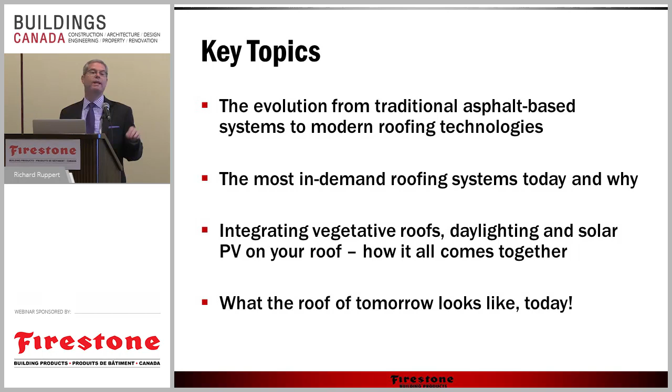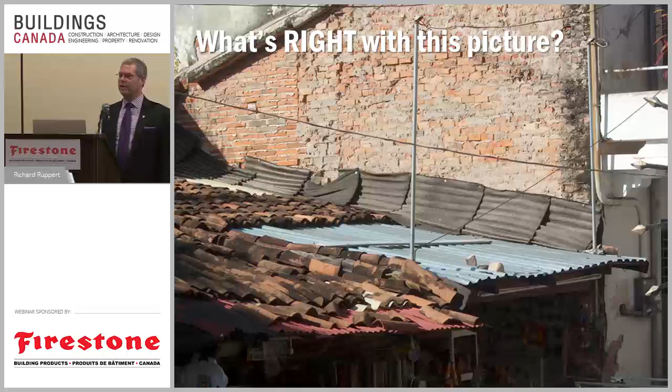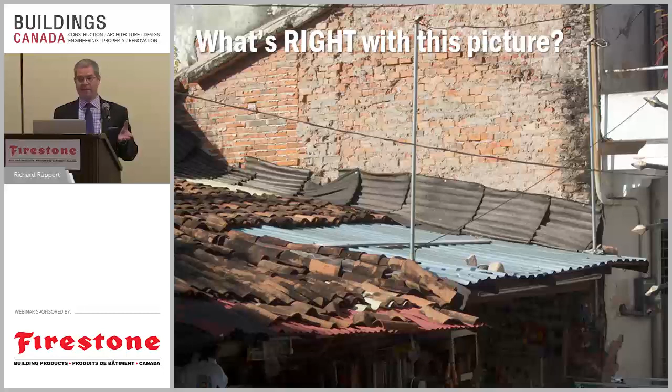What else is really present here? What do we see there? Not just flashing, but step flashing. Again, a basic understanding of how things work. Now, if anybody's environmentally conscious and sensitive to the environment around them, I think you'd be hard-pressed to say that this doesn't make ample use of local and regional materials. I'm guessing that most of this stuff came from less than a 500-kilometer radius, so you've met some LEED credits somewhere along the way, I'm sure.

It's a little bit in the dark there, but this is a retail operation, so it is, in fact, a commercial roof. There's no question about it. And you've got mixed use of materiality. What it's really meant to say is that even in the most primitive of circumstances, the need, the understanding, the provision of basic shelter is right here.

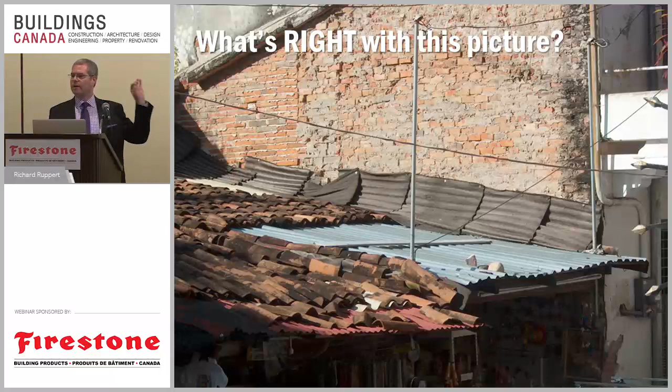It's right here in our heart. It's right here in our mind. We know this stuff. It's common sense. It's not rocket science. Now, there are a lot of elements of rocket science that come into play, no question about it—the advancement of the materials, the differentiation—but when it's all said and done, it goes back to a very fundamental idea or concept. When we talk about commercial roofing, it's pretty simple. There's really only three categories that we need to discuss.

Bitumen-based systems, asphalt, coal tar pitch. I have to apologize in advance, I am not as clear on the availability of certain materials here in Canada as I am in the lower 48. But coal tar pitch is only available from one manufacturer and is not very well used anywhere in the States at this point.

Is coal tar still something that you can find here in Canada? Yet arguably at one time, maybe even now, it could have been considered the most sustainable roof that's there. I had the good fortune of working on a project in northern Indiana, where I'm coming from, a cold weather climate, a lot of built up bitumen up there.

A 75-year-old roof. The problem with it was that the person who had maintained it for 74 years prior passed away - I should say the 2 or 3 tenants. But therein lies part of the problem that we have with asphalts and bitumens. Not only are they constantly changing and organic, but the persons who are entrusted to take care of them are dwindling. The supply is no longer putting together a demand for persons to be able to do this.

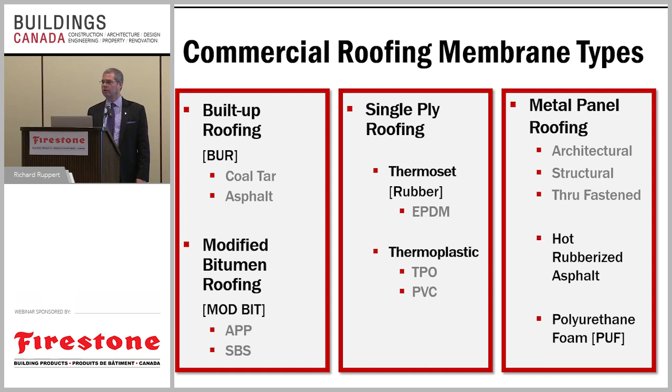And polyurethane foam, puff roofs for short. It's just as the name implies, it's a spray foam that goes right on top of whatever's up there. Encapsulates it all, and once you've put it on, you're never going to get it back off. So it better work. It's an incredibly good roof for the desert southwest, arid climate. I would be hesitant to promote it in any other environment.

So when it's really all said and done, we've got 2 categories: bitumens, single plies.

When we talk about bitumens, there's really two families. The old built-up four plies—more plies, more tries, that's right, more plies to get it right. They benefit from their inherent redundancy. They have a long history, 100 years or more.

They use a lot of water-resistive materials, most often relatively organic in nature. So from the time they are put down, they begin the deterioration process at somewhat an accelerated rate. Now there are stabilizers, elements that go in to cut down UV degradation and help with the amplification that water or moisture brings. But when it's all said and done, the technology and methodology has remained pretty much unchanged since its inception about 100 years ago.

And then the modified bitumens, the two-plies. We've taken something that was really aggressively involved, very craftsman-driven if you will, and drawn it down into two plies, two sheets, a base and a cap. Maybe a base, interply, and a cap if you need extra dimension or durability out of it. But the beauty is that those plies, that base and cap, are manufactured—consistent dimension, consistent thickness, predictable behavior.

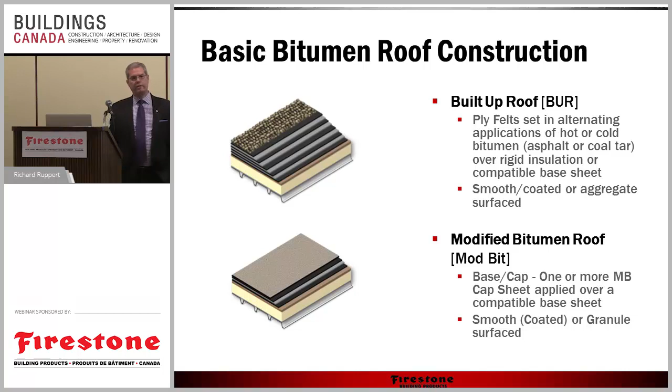But really, when we talk about bitumen construction, it's either four or two, that's about it. Built-up roof construction, just as the name implies. Here you can see you've got your hot bitumen going down. You've got what are called ply felts. Those ply felts get embedded into that hot asphalt, that hot pitch. And then another layer, and another layer, and another layer, each one staggered a quarter over each time.

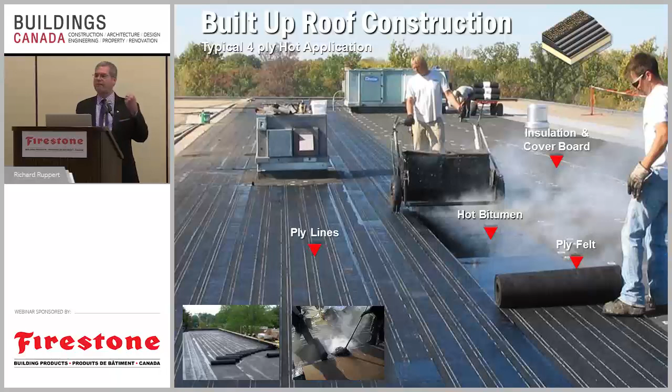So that when you ultimately get done, no matter where you pierce it with the screwdriver, which invariably is going to end up going through a roof at some point, it will have gone through four plies of material. Inherent redundancy, that's its real strength. Very, very susceptible to changes in environment, from hot to cold, from age, from dry to moist. All of those have a fatiguing effect on that assembly. That redundancy becomes an absolute necessity.

What do we do to protect it? Well, more often than not, we put aggregate on top of it. The aggregate creates a stepping surface, something that can take impact. But it also, maybe more importantly, blocks out some of the UV that might otherwise destroy that top layer.

What do we see, though, downtown? What do we see in most cities? We see some sort of paint, some sort of application, aluminized. Look out of the building, anybody staying on a top floor of a hotel around here—take a look at the roofs down below you. You may see a lot of silver roofs, an aluminized paint essentially, that's just protecting that top layer.

But when it's all said and done, there's a lot of work going on. Why? Because the roof is being manufactured in place, in situ. The elements may have come on a truck, but each one was individually handed up onto the roof and included to essentially manufacture the roof right there on top.

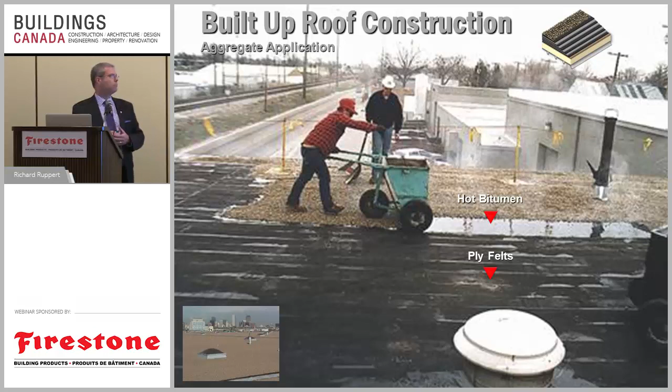There's recently been some other concerns about built-up roofs, particularly asphaltic roofs in general. Are there carcinogens involved? Because there's a tremendous amount of petroleum invested in this process. Is the bitumen we're using in place of coal tar as carcinogenic, or even possibly more because of their chemical composition? It's not a natural ingredient. To coal tar's benefit, at least a lot of it was organically being combusted or broken down. Is it maybe not carcinogenic, but is this high exposure, continued exposure to this, going to be a problem?

Because of off-gassing—as things deteriorate, as things break down, they begin to release whatever's within them, correct? Well, think about this: a petroleum-based organic material being released into the environment, and somebody's working in that every day or working around that every day. Are there inherent risks there that might not be present in other technologies out there?

There's a lot that contributes to this, and I haven't even touched upon the availability of oil, the availability of the ingredients. I know this is true in Canada just as in the United States—the asphalt, the bitumen manufactured for the roofing industry is from the bottom of the barrel. You know, when we use that term, it literally is from the bottom of the barrel. But technology has advanced and is able to crack the molecules lower and lower to raise it to a higher percentage of use, a higher purpose, a better purpose.

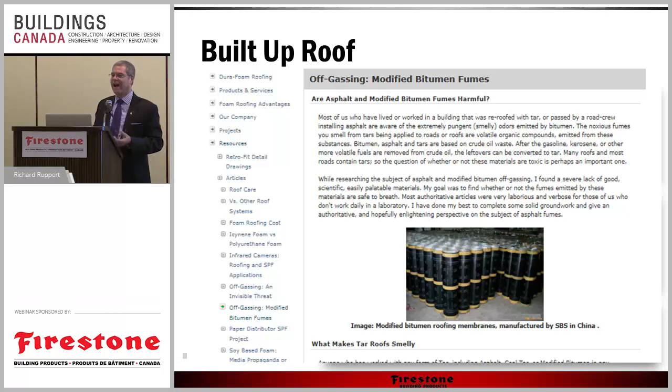There's one, SBS. The reason I know that, I work for Firestone Building Products. I get to see how much we sell of everything, and we sell all of it, by the way. That's one of the things that gives Firestone Building Products a unique opportunity, is that we're the manufacturer of all forms of commercial roofing. We're number 1 or number 2 in the United States, and we rank very highly in single-ply categories here in Canada for sure. So we can see all of it.

Anybody want to tell me how many rolls of APP, or plastic modified bitumen, we shipped to Canada last year? Just a random number. 3,000? 15,000? That's right, zero. And it actually comes as somewhat of a surprise, because it is a northern climate, I get that.

APP doesn't really translate well because it's plastic. Plastic wants to harden. SBS responds favorably well. It's rubberized, it has a higher tolerance for cold temperatures, right? But the single most popular roofing in New York City, which is arguably a cold weather climate, is APP.

APP torch down, to be exact. Why? Because you only have to have a truck and a torch to be in business, right? It's pretty simple. Well, I'm sorry, New York City - torch, truck, and a driver. Nobody pays for staging, so meter-wide roll, they can just toss off however many rolls they need. And they roof from 6 o'clock at night till 6 o'clock in the morning, and then they're gone again.

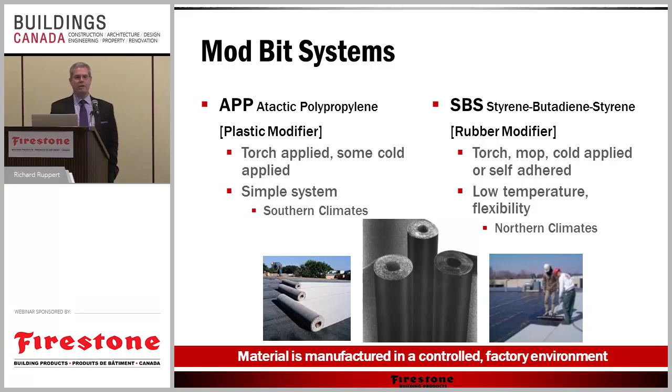It is manufactured in a controlled environment. That does make it one step above, in some ways, the built-up roofing market. There's no question about it. And you can see that it goes down pretty simple - base layer and a cap layer. Offset it by a half. Start with a half sheet on the top cap.

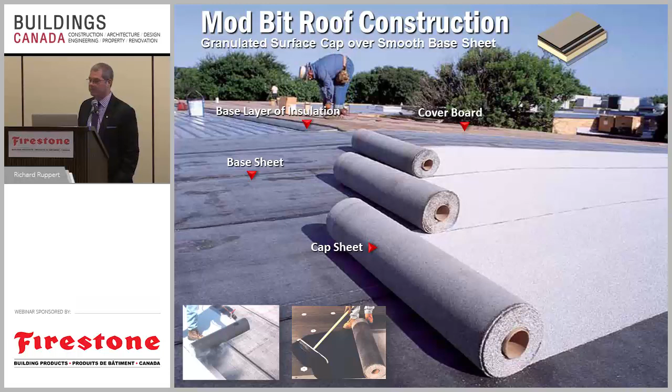It can go down as a torch down. It can go down in what's called cold apply, where you're basically mopping it out or brushing it out. It can also go down as a hot applied, at least with the SBS. You see that going down as well. You can only hot mop the SBS, by the way. But you can see that we're still largely manufacturing the roof on the roof. We're having to perform all of that right there.

By the way, when you have something like this, when you're working with that, you need 2 crews. You need a boot crew and a tennis shoe crew, and I'll explain that in a few.

However, because of the advent of modified bitumens, or the use of modified bitumens, you can also get those in bright white caps. So if you are trying to meet a higher initiative, a LEED or a Green Globe, or just want that higher reflectivity for whatever reason you're trying to achieve that, there are bright white caps out there available to you. There's no question about it.

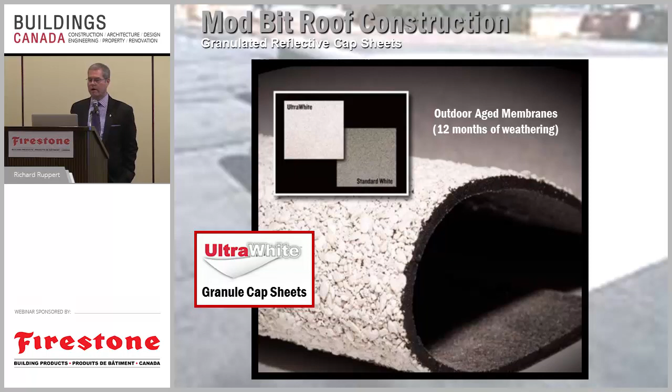But by and large, this is still the most popular way for modified bitumens to go down, APP or SBS. Matter of fact, SBS is of the two, the more growing, or has a higher growth potential.

But the bottom line is it's still open flames. You've got that open torch. What does this do? This is called a dragon wagon, by the way, for obvious reasons. You now no longer have one man or woman up there with a torch swinging it back and forth. You've got literally an entire explosive device spewing out 5 or 6 jets of flame on top of the roof. What's the inherent problem here?

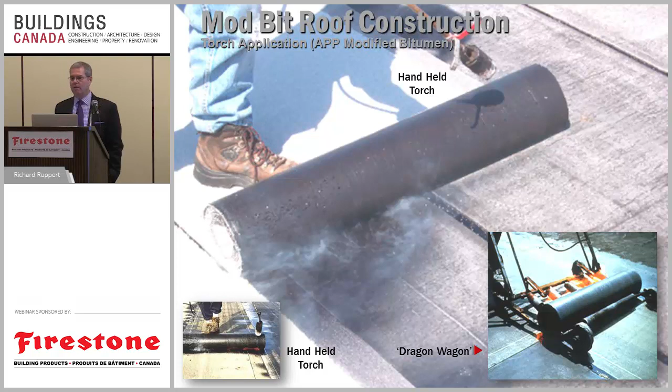Control. Control after the fact, though. Quite frankly, it is not so much during the time of installation, because you're seeing that, you're walking, you're doing your thing, right? It's good. But at the end of the day, what else has been affected that wasn't apparent when you were there during the working hours? I can give you examples from right here in Canada itself.

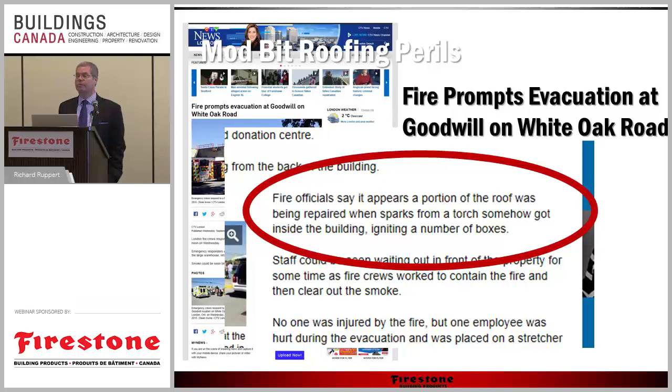This is the Goodwill out on White Oak Road. Fire officials say it appears a portion of the roof was being repaired when sparks from a torch somehow got inside the building, igniting a number of boxes. That's called incidental damage, by the way. The roofer and the roofing manufacturer, they're essentially going to be held harmless, because they can't be held responsible for anything inside the building.

And it'll go through a lot of litigation. It'll be fought, and there'll be a lot of battles back and forth. It'll be in the paper a few times, but when it's all said and done, it's the owner who's going to take the onus for this in their insurance.

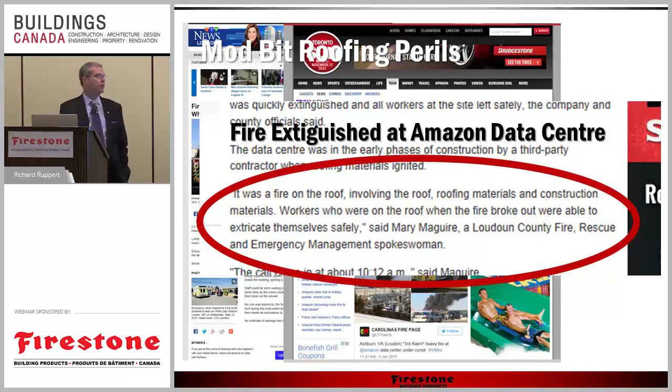Fire codes do end up getting changed. This was Ontario's fire marshal. By the way, this was just last year, and unfortunately, tragically, this fire smoldered for about 40 minutes before anybody even knew about it, because it was in between the roof and the ceiling. It was not exposed. And the valiant men who showed up to fight that fire, 2 of them lost their lives. It was not intentional. It was not something that anybody would have ever thought could have happened, but it happens a lot. It happens a lot.

Asphaltic roofs, bitumen roofs, have a large part to contribute to that. So at the very least, exercising a high degree of caution when doing these types of systems is a necessity.

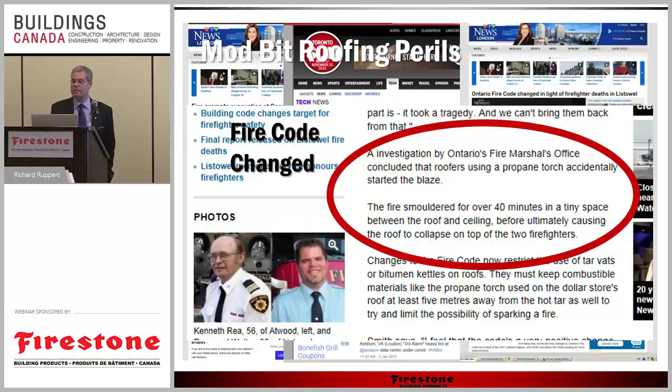So what are our key takeaways? Well, it has been performing well for many, many years. There are a tremendous number of installation options. You can say that either as a positive or a negative, because when there's so many ways to do something, there's rarely any one good way to do it, quite frankly.

Where I'm coming from in Indiana, we have a horticulturalist, and people were having a problem with moles in their gardens and lawns, and his name is Dick Crum. I said, Dick, I have a mole problem in my yard, what can I do to take care of it? He goes, well, there's about 50 ways you can do it, which was another way of saying there's no way to do it. There's no good way to do it.

They do capitalize on their redundancy. There's no question, more plies, more tries. It's a little tongue-in-cheek, but it does build in some resiliency. But it has to be there because it's really sort of compensating for degradation. Thermal shock, hot and cold, water, UV, all those things are constantly barraging what is largely an organic element.

And they have adapted to today's world. We've seen that. Bright white. It's the first one I can think of right away.

But they're often complex, and we've seen when we talk about the torch down, we talk about the fire, etc., they can become unwieldy. And there's a dwindling labor pool that, whether they have the skill or not, don't have the desire to do it.

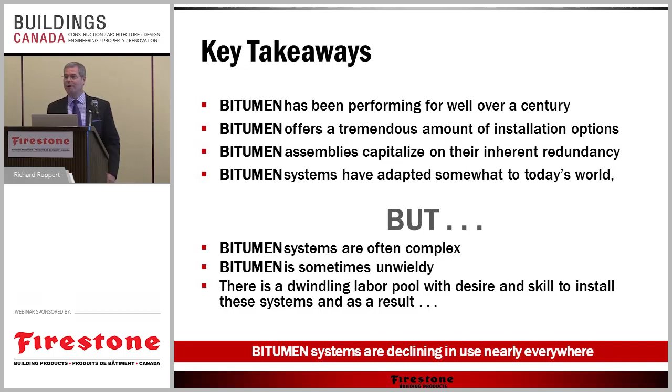Which brings me to the viable alternative, maybe the preferred alternative. But I have to let you as professionals determine that. You have to become knowledgeable, you have to become comfortable, you have to gain that understanding of whether or not this makes sense for you.

But at least from my own perspective, I think you have to give it a fair shake. You have to really look at what these alternatives offer you, but more importantly, what do they offer to the ownership of these roofs? Because we specify them, we sell them, we install them, and then we're at the next roof. Somebody has to own this thing, and it's going to be that person that has that building for the next 10, 15, 20, 30, or in the case of school systems, hospitals, 40 or 50 years maybe.

So think about that. As I mentioned, when we talk about single plies, there's only two types: thermoset and thermoplastic. When we talk about thermoset, there's only one, EPDM. Talk about thermoplastic, there's only two, TPO and PVC. And you can see some of the things that really define these.

EPDM is a permanently formed membrane. It's vulcanized. It's rubber. Now, it doesn't come from a rubber tree plant, but it mimics that, just like tires. Tires do not come from rubber tree plants, but they mimic that. The reason I know that is because the company I work for, Firestone Building Products, has a key name in it. Does anybody know what might make us uniquely qualified to be in the rubber business?

Only about 125 years of tire manufacturing. Harvey Firestone manufactured those tires over 100 years ago. He first started out with natural rubber. What color were they? Cream. Unattended rubber from a rubber tree plant, organic, is cream colored when it's coagulated, when it's made into gum.

Adding carbon black, a granular powdery ingredient that goes into that goo, is what gives it its tenacity, gives it its UV protection, gives it its longevity against wear. Before Harvey Firestone, tires were white, and now they're black. We like to say it's because he wanted to see a better looking car at the Indy 500 track. I'll buy that. I'm from Indianapolis. I like anything racing, Dobermans on roller skates, I'm there.

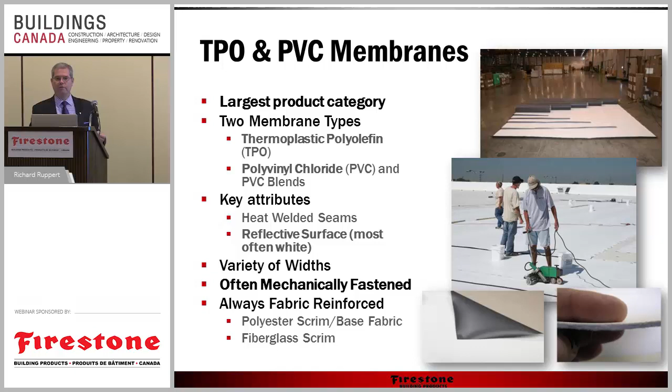We saw that it didn't work early in the 1980s. PVCs came over from Europe. They were dark in color. Those things heat up, they had no reinforcement, there was nothing there to keep it intact. We had things that were called shatters. Literally, they would shatter. It looked like a dry creek bed on top of the roof when it was done. I had the good fortune of being inside a building when that happened one time. It sounded like ice splitting in the spring. It's when you know you've got to pull the roof back off. My friends in Thunder Bay know what I'm talking about.

So, in any regard, the difference is PVC and TPO are both plastic, but TPO is what it is. The ingredients that go into that are alloyed together to make it soft and pliable by design. Polyvinyl chloride, PVC, has to have a plasticizer. Without the plasticizer, without the softening agent, PVC becomes what it was intended or what it wanted to be. Schedule 40 piping, think about it.

Rigid PVC piping, very, very popular, used in a lot. No plasticizer. The plasticizer is the ingredient that makes it pliable. But in simple terms, it's what's agitating that compound. It could be liquid, could be actually what they call a dry plasticizer. But in order for the dry plasticizer to go in, it still needs a liquid to embed it.

And from the time that it's manufactured, it is now fighting and really having an inner struggle with itself, molecularly or chemically, because it wants to evacuate. The plasticizer does not want to be in the material. It keeps it pliable, but it wants to evacuate. That scrim that's in there does a lot to help it get purchase on something to stay in there.

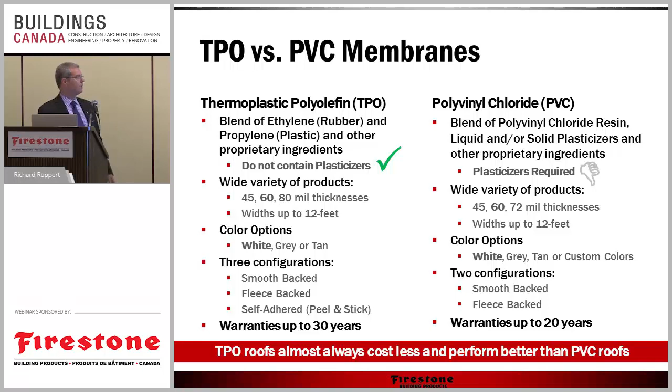Less involved. I'm going to spend a little more time, though, talking about thermosets. Thermosets, one category, EPDM. EPDM rubber, synthetic rubber. Common thicknesses, commensurate with what we normally understand, 45, 60, 90 mil.

You're going to find that this is true across all stations, across all manufacturers. There might be a little variance here and there based on application. Pond liners are generally only 38 mil or 35 mil, but that's not roofing. We're talking about roofing today.

60 mil, no question, the most popular. And I find very little cause, you should find very little cause, to really be considering a 45 mil. The greatest use, the highest use I find for the 45 mil membranes at this point, just based on application, is when you want to provide a sacrificial layer, a separate loose laid layer to protect the main body of the roof. Works very, very well for that kind of an application.

So even in an inverted roof? Even in an inverted roof.

Part of the reason is because of puncture tenacity. I understand that an inverted roof might in fact be considered a protected membrane, quite frankly, because you're putting some sort of a ballast over the top of that, oftentimes an insulated composite ballast, maybe a concrete pad within. But the point is that things will find their way down to that roof surface. Things will be underneath those pads as they're going down, et cetera, et cetera. And any kind of traffic, any kind of impact on that suddenly makes that have a higher potential for puncture.

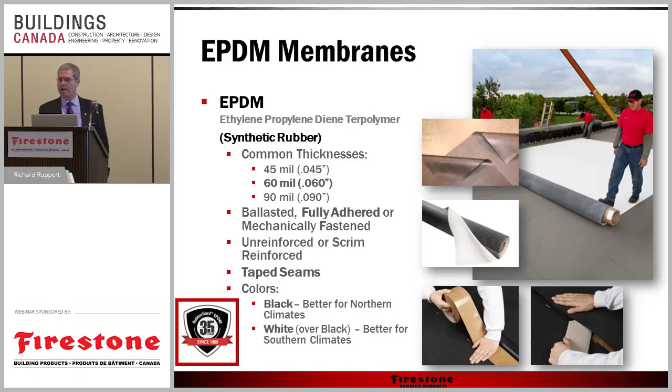They primarily are black, but you're going to find that there's also white membranes as well.

They use seam tape. Why is that important? Because for a long time with single plies, the Achilles heel of the single ply membrane was the seaming—how do you get it consistent? Well, that element has been removed with seam tape. Seam tapes themselves are engineered to be much more predictable and precise in their application, and the adhesives are designed to gain greater tenacity over time. All adhesives have to cure, right? No question about it. So with EPDM, as that tape seam cures, it actually gains higher and greater purchase on the membrane.

Now you will see a small bead of sealant run along the cut edge of the membrane oftentimes. What is that really doing? It's only necessary to be there for the first 2 to 3 months of the application, because it's protecting the seam while it cures. So sometimes you'll see the sealant at that cut edge start to look like it's degrading—rest assured, you do not have a problem, because it's most often there only to protect that major seam as it cures out. Once it's cured out, no issue.

Cleaners and primers—a variety of those available, and we'll talk a little bit more about those as we get into it. And some way to apply it. These are really the primary contents of what you have to have for a single ply EPDM roof. That's it. No kettles, no pumps, no machinery.

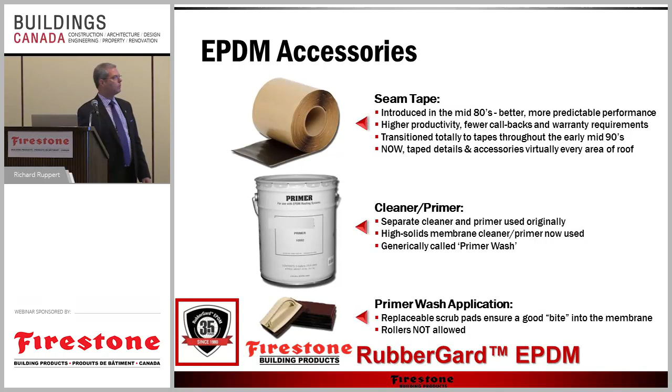Yes, there are some buckets that are always 5 gallons, and we'll see in other ways those become important. But the beauty of it is all the accessories. All of these single-ply systems, and most particularly when we talk EPDM, have pre-manufactured, pre-engineered accessories—the boots, the inside and outside corners, the fasteners that might be needed as a supplemental application when you're not fully adhering everything or you're tying off at the perimeter. And then all of the sealants and/or adhesives are also especially designed, not just for the material itself, but also the region that the material is being performed in, which is becoming more and more of an issue every day.

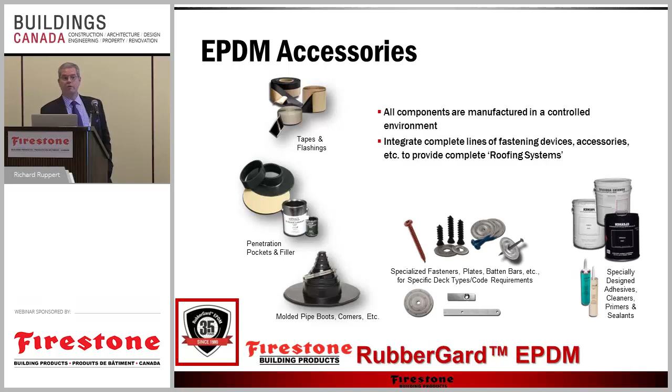Thank you very much. The question is, what is the life expectancy of an EPDM roof? Well, we don't know yet. What we can say with absolute certainty is that 35 years has been easily achieved, and we're heading towards 40. As a matter of fact, Firestone Building Products this year is celebrating its 35th year in the EPDM roofing business. And the first roof that we put on is still operational and functional in Wisconsin—not exactly a mild climate environment. Best guessed estimates are that the membranes themselves have a lifespan that's going to go well beyond 50, maybe 60 years. Who knows?

It's always been the case, and this is true of any of these roofing systems—it's not necessarily the base material or the core material. It's the application, the details that have gone into it, the seaming, the flashing, those ingredients that make it a comprehensive system, that have been more prone to failure than the materials themselves. So right now, the lifespan of the material itself is somewhat indefinite, quite frankly. A lot of things go into it.

How easy is it to put these things together at this point? Well, it's pretty easy—you mark the membrane, but oftentimes we already know what that mark is going to be like. You do have to scrub it or clean it because there's talc on an EPDM membrane when it's manufactured so that it doesn't grab onto itself during vulcanization. But you want to make sure that talc is washed away so you've got a dry, tacky surface. Applying the tape over the top of the primer, a bit of braying of it, using a roller to make sure you've got good purchase on the material, then lapping in the adjacent material and pulling out the release liner of the tape, then braying over the top of it, and you're essentially done. You might go back in with a beaded sealant if specified along that cut edge, but otherwise, that's all there really is to putting together one of those seams. And we know that we have a life expectancy on that seam that can be warranted for up to 30 years.

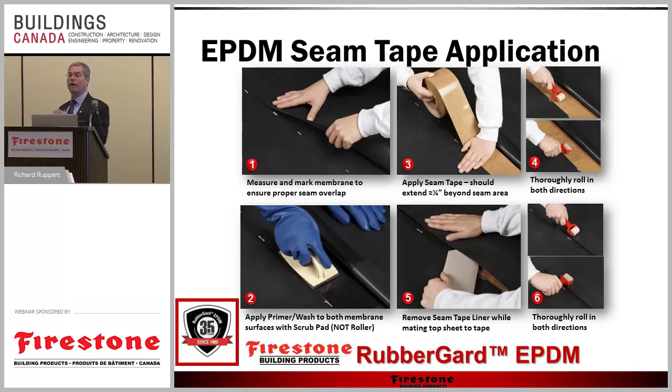Not talking about the backsides of parapets and flashings like that, but someplace that you know is going to have a certain amount of lingering water, let's say. That might require a tape over. But that's all there is to it.

They've been improving, and they've been in use in all geographic areas for well over 30 years. All of the historic performance issues have been resolved. Some people used to say that rubber roof shrinks. Well, it didn't really shrink. What was happening is that persons were putting it out with too much tension to begin with, and so it was just essentially returning to its natural shape.

What we've learned over time is that when you put it out there, you need to let it relax into place a bit. And the way that they were being tied off at the perimeter, it used to be they were just shooting it down with a board and some cap screws. Now there is what's called a base tie-in or a relief strip that you put into the membrane or the roof surface at the corner, at the perimeter, that can take the tension of the horizontal so that anything that goes vertical, up and over parapets and curbs, is essentially in a non-stressed fashion.

You can simply adhere that or affix that to the backside of the curb of the parapet, and it's not being affected by what's happening in the horizontal plane of the membrane. So those are the things that we've learned and that have been resolved over time.

EPDM has the greatest variety of membrane options available to it, no question about that, and the greatest variety of installation options available to it as well. And when it's all said and done, these have the highest warranty available of any of the systems out there. You have to go to special measures sometimes to get extended warranties in asphalt for certain. You have to go to special measures to get extended warranties in thermoplastics because the plastics and the way you weld it are significantly different. So it's sometimes easier to achieve extended or longer warranties on EPDM roofs.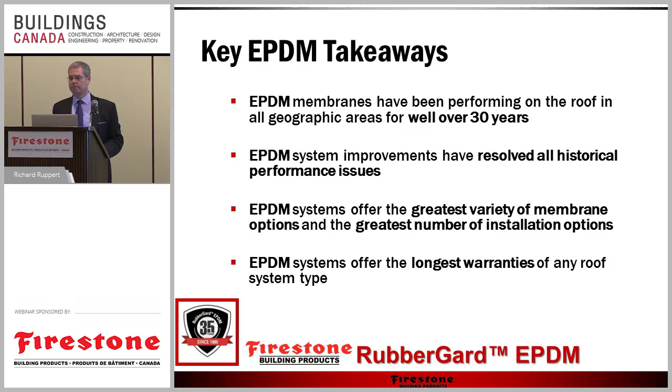When we talk about roofing systems, we're really talking oftentimes about how they're attached. Yes, we talk about their basic composition - it's an asphalt roof, it's a TPO roof, it's an EPDM roof. But maybe more important, and certainly very important to its long-term performance, is how it's being affixed to the building. How does it stay in place? How is it going to perform under the dynamics that affect a roof?

Because you not only have wind scour and rain, the very obvious ones, but you also have uplift pressure - pressure that's happening inside the building. That's dramatically different from a big warehouse with overhead doors versus, say, a speculative office building with a relatively small footprint. And those dynamics are happening from under the roof, pressuring it, pushing up on it.

What's the single most destructive force on a roof, though? Bar none - gale force winds, hurricanes, tornadoes, sun, UV? No, good answer, though. The most destructive force, bar none: the mechanical contractor, no question. Rooftop traffic from the mechanical contractor. I'm picking on them. Any mechanical contractors here today? Good, because we won't have to lynch you.

That rooftop traffic - and why do I pick on the mechanical contractor? Because if they're up there servicing rooftop units, all rooftop units have filters on them. All those covers on those units have 36 tech screws that go around the perimeter. After the first filter change, how many tech screws go back in? Two - upper left, upper right. Where do the remaining 34 tech screws find themselves? That's right there on the membrane of the roof, underfoot of the contractor who just serviced the filter.

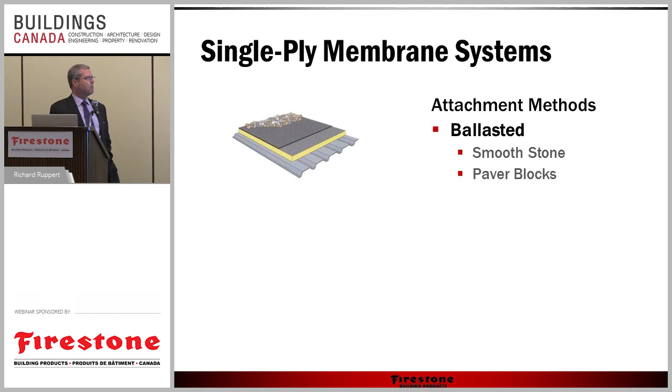Oldest and longest sustaining ballasted membranes. It's basically where you're just putting the membrane underfoot with something to weight it down. Concrete pads, more often than not, river wash gravel. Could still be considered an environmentally sensitive roof. I mean, you're adding mass. The color is relatively light.

That thermal density actually qualifies it in the States for what's called Title 24, the highest standard established by the state of California. They come out with the highest standards to be met or not met by everybody out there. But just be aware that they have a lot of weight involved with them. These put increased weight on the rooftop building.

Where do I see these actually most popularly employed? Single-story grammar schools, K through 12 kind of work, no question. And if you do employ this, the key word here is ballasted. There's no mechanical attachment, no adhesive to make it fully adhered. It must float, and the elements under it must float too. The insulation is loose laid, the membrane is loose laid, and we're just weighting it down.

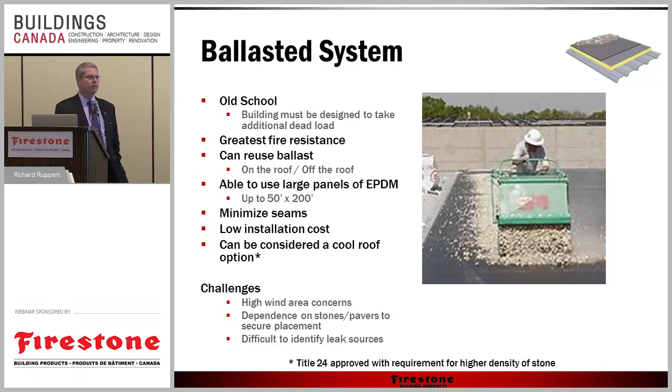Beautiful thing, they can do very large panels because they're uninterrupted, just seam to seam to seam. It is sometimes a little bit difficult to find the leaks, as you might imagine. And this is what it looks like going down. Protection mat is always a good choice. It's not absolute, but it is a good choice. And you can see the precision with which it's laid.

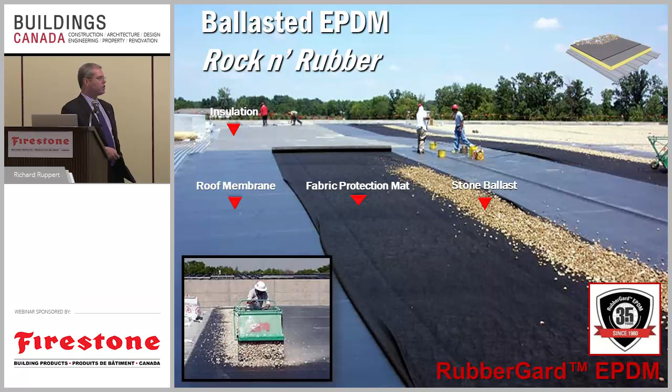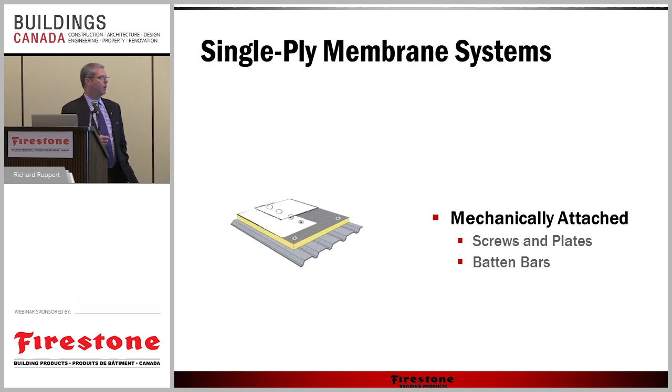Mechanically attached, I really reserve that for the thermoplastics. That's where it has its highest degree of popularity. It uses screws and or batten bars. You're kind of limited to narrower panels, or at least narrower widths to think about when putting it down, because more often than not you're going down in the seam itself. That attachment point has to work to withstand those uplift pressures from behind.

So you're talking about 10 feet, 8 feet, 5 feet. Problem is it goes off module. If things are manufactured in 10 and 12, that's great, and if you can get your seams to be 10 and 12 feet apart, that's great. But most of the standardized insurance protocols and uplift resistance requirements out there go out to certain figures - you can see this for yourself. They're going to require a seam every 8 feet or every 6 feet or something like that, and it's going to go off module. It's going to cause you some problems getting what I call efficiency out of the materials.

And it's almost always a linear attachment as well. It can allow for flutter. These things get noisy. In colder climates, where you haven't taken necessary precautions with air barrier infiltration or insulation, you can get flutter. But more importantly, you can get frost, because there's a certain amount of cavitation that happens underneath a mechanically attached membrane. When that pressure's in there, it may only open it up a small millimeter or centimeter, but that's just enough to possibly have moisture form beneath the bottom side of the membrane and the top side of the insulation.

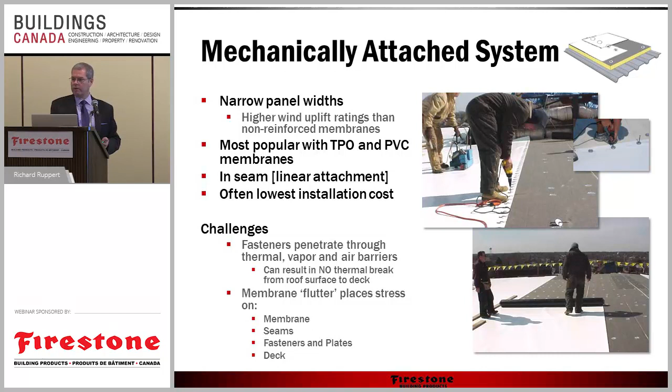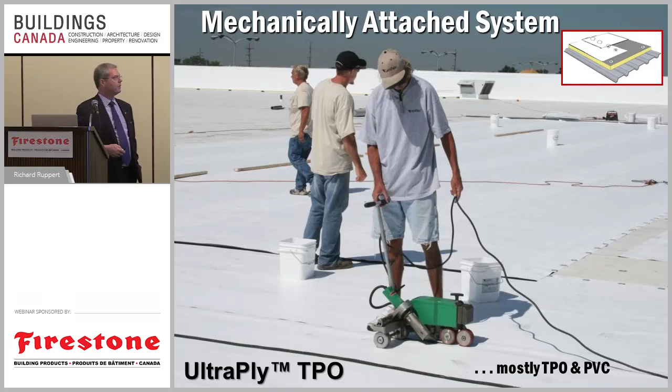There is an alternative when you are talking about doing mechanically attached induction welded. This is where you are able to attach the entirety of the system down to the substrate, the deck, and the plates themselves. The fasteners have the constituent TPO already on them. You come back and you magnetically or heat weld it to the backside of the membrane. So what does that mean?

Well, it means that your membrane goes down over the top of this. You can weld it wherever the seam or the sheet ends, as you would want, and you're actually attaching it from the backside with this welder. Then as you hit each one of those, you're hitting it for about 30 seconds. Then you come back with this weighted tool, it's almost like a coffee can full of concrete, basically, with a magnet in it, and it just further makes sure that you get that contact. You're going hand over fist, just walking right down the rows to do that.

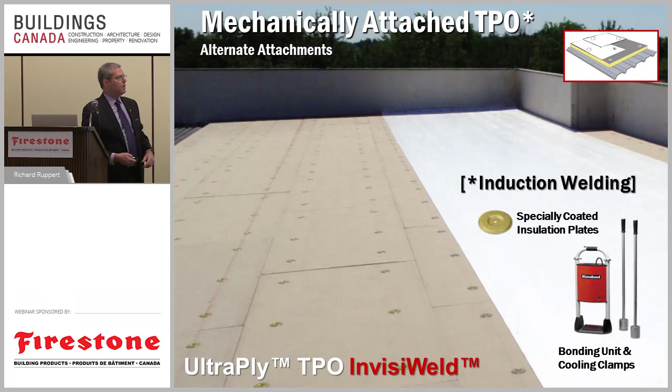Another way that you can actually attach the thermoplastics is with asphalt. So you can encapsulate an existing bitumen roof with a TPO membrane. You use what's called fleece back. It has fleece on it, and it also has an edge that doesn't have the fleece on it so that you can weld it.

You need to get your roof predominantly very, very clean. It needs to be scoured of all aggregate, and it needs to be able to accept the bitumen so that the membrane itself can get purchase on what's essentially the hook or the loop side of Velcro, the fuzzy side of Velcro, and that will seep up into that.

You can also do it with adhesive, and that's actually a cleaner and more effective mechanism to do that, quite frankly. But you get a fully adhered roof, and you're encapsulating what is otherwise a dry and performing roof. I hesitate to recommend it, because if you have moisture that's already entrained into the roof or other issues, you're now creating a greater hazard, or greater chance of degradation.

Boot crew and tennis shoe crew, for obvious reasons. This person's in the mud or in the tar. This person's out on top watching it. You need a third person. This would be the son or the daughter looking for that summer job.

We call it the Bestine boy. Not saying this to be sexist, it's just alliteration. The Bestine boy goes around and cleans all the black splotches off of the white roof so that when the owner sees it for the first time, it looks clean. They use Bestine.

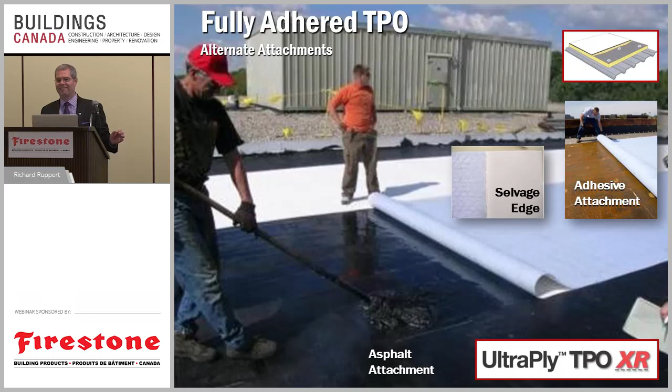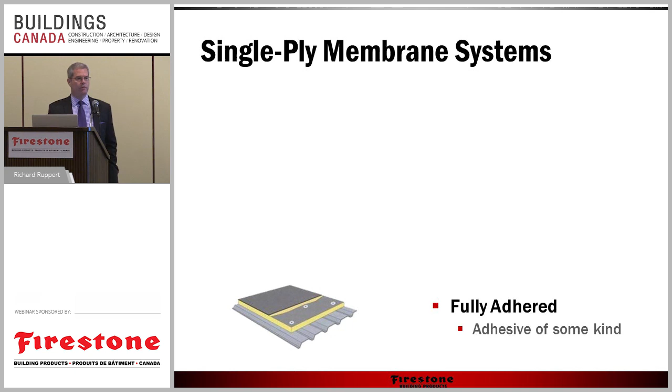Fully adhered. This is without a doubt the best way to do this particular system. This is the way to go about working with EPDM, certainly, but it generally will provide you with the highest degree of surety in your roofing system, to go to fully adhered types of systems.

Traditionally, it could be mopped out or sprayed out to put the adhesive down, and when I say the adhesive, it's essentially a dry tack primer or a dry tack adhesive. You're putting it out moist, it flashes off, gains a certain amount of dryness, and you're doing the same thing to the backside of the membrane simultaneously, and then when they're both dry, flopping it in.

And because you're doing it over and broadcasting it over the entirety of the body of the roof, you know that you've got a high degree of attachment, even if maybe a small pocket here or there didn't actually get hit, it will in fact have a broadcast attachment to it that's going to be complete and continuous. And if you go to the next level and make sure you roll it out, bray it out when you're done, you're absolutely going to get that contact.

Okay? Love this. We're talking about 5-gallon jugs or 5-gallon buckets. This is called the Better Spreader. It's basically a roller cart with tubes that have been cut off at a high angle, like a poke, like an oversized needle, a hypodermic needle kind of thing. But they're on this carrier that basically you just drop the adhesive onto, and it drops it out onto this roller that then just drags it across the roof and rolls it. Greatest, simplest, most intuitive invention I think there is.

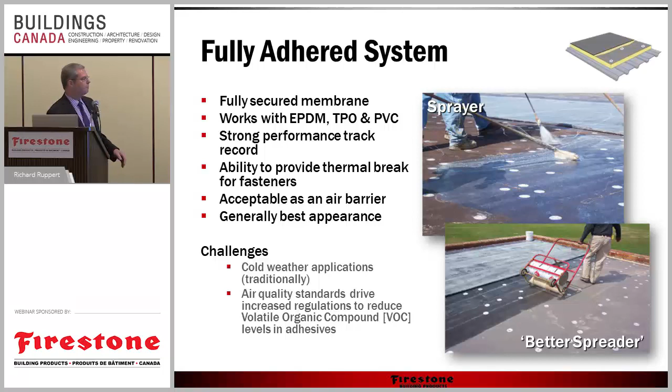Challenges for EPDM, for thermosets, for adhesive roofs in general has always been sort of temperature, but this is what a beautifully taut, black-bodied EPDM fully adhered looks like.

I say reinforced and non-reinforced because it's going to outwardly have pretty much the same appearance. The reasons you would choose that might be twofold. One reason is if you have to reach a certain insurance specification. FM, Factory Mutual, a global insurance company, is the big one. Almost all of theirs are going to require a scrim in it. Why? Not because it's giving you better service necessarily, but because it was able to be destroyed.

A non-reinforced membrane, how do I put this? We cannot test a non-reinforced membrane and destroy it. It has 300% elasticity and goes right back to what it was like. We can't produce equipment to put enough pressure on it to actually destroy it. But we can produce enough pressure to destroy the scrim itself, which will then tear the membrane at the same time. So really the reinforcement is mostly to reach a testing achievement that can be quantified by the insurance industry. Crazy stuff, right?

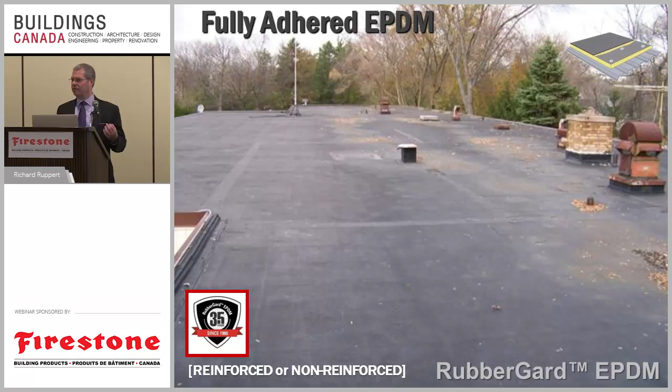The other great thing about reinforcement is impact resistance. Screwdrivers, foot traffic, embedded stones, et cetera, that reinforcement will give you greater puncture resistance, particularly from sharp objects, which are the only real issue when we talk about a single-ply membrane. It's not the boulders, it's not the big things, it's the little things, the sharp things that cause a problem. And how many sharp things do you really have on the roof, or should you have on the roof to begin with? But it's just something to be aware of.

Here you can see it going down with the pre-taped seams. It's also available in white. Matter of fact, it's a very popular choice. We see this used a lot in the Pacific Northwest part of the country in the United States. I'm also seeing quite a bit of it being used now throughout the Midwest as an alternative to TPO.

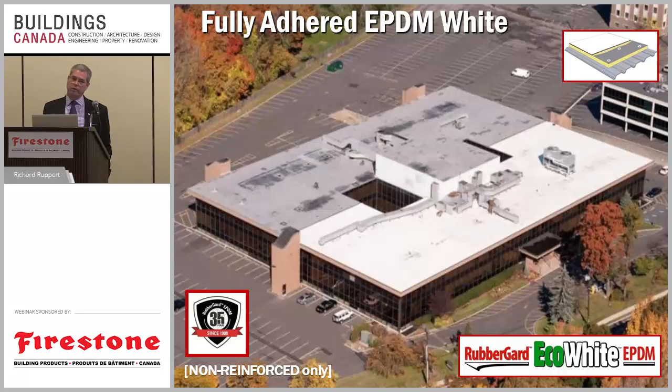This is what I really wanted to get to, though. Times they are a-changing, and they are changing quick and dramatically.

Self-adhering membranes, frankly, have been around for quite some time, about 10, 12 years probably. But they were all based on hot melt glue, for lack of a better term. And they required that you put a primer down on the roof so that the adhesive that was on the membrane could get attachment to that roof.

And it still had to be 40 degrees and rising, 6-plus degrees Celsius and rising, right? Trying to do my Celsius to Fahrenheit equations, I'll try to do them quickly. So it still required, it worked, but it worked only in those situations where it was sunny and warm. Other times it was very temperamental to try to get it to affix and stay well. Worked, but not maybe that great.

Firestone Building Products has done a lot to advance that. With the Firestone RubberGard EPDM SA, with what we call Secure Bond technology, we've overcome that issue. Why? Well, because now all you do is kick it out, pull away the liner, finish the seams, and walk away. No primer on the deck, no additional adhesive applied to the material. Just a simple release liner.

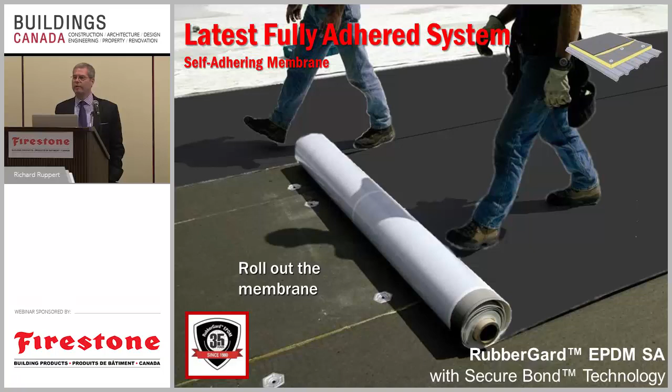You can see right there, there's a little bit brighter white line in there. That's because the release liner is in two halves. The way that they lay this down is you kick it out, you release half of it, tack it into place, then release the other half and flop it in. Okay? You get the idea there? The principle that's at work? You can kind of see how this is going on there. Then come back and bray it.

Here's the thing. We're already seeing folks in the field who are kicking the whole thing out. They got one person up at the head of the membrane, standing on it, or they cut away a little bit to just tack the leading edge. And then there's one person kicking the roll out while two persons are walking behind them, pulling the liner out simultaneously at a 45-degree angle. So they're laying it all in one pass. It gains purchase on the substrate when it has pressure put on it, not just by laying there. So the pressure is what actually gets it to take point. Okay? It's what gets it to attach.

And once you've rolled it in, it's there. It stays. No primer. Most important thing, although my folks in Thunder Bay told me why it's not that big a deal.

-6 and rising, 20 degrees Fahrenheit, -6 Celsius and rising. Every other roofing technology requires 40 degrees, 7 degrees and more. This can go on at 20 degrees and rising, no primer, directly onto insulation. The only thing I'd say is if you're putting it directly onto concrete, which I'm not sure why you necessarily would, maybe a lightweight concrete or something, you'd want to seal that concrete.

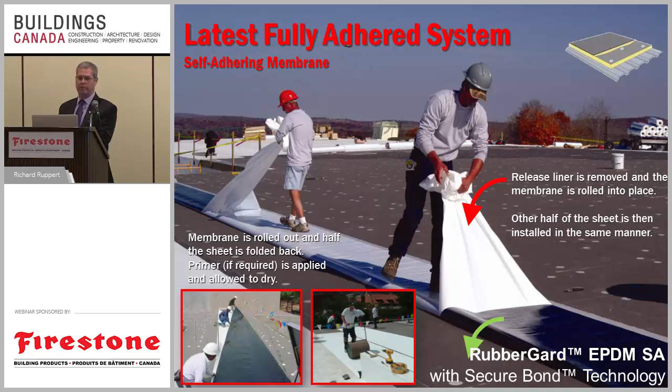Just to show you how this trend is going, this is what we've seen happen over the last 5 years. Whereas asphaltic roofs made up over a quarter of the market that was out there, just in the last 5 years alone it's now almost 80% single-ply membranes, and that's in 5 years. That may not seem like much, but that's because we're thinking about how many roofs are in our neighborhood. Expand your mind, expand the concept, expand the dimension you're working in - worldwide, this is huge. This is absolutely huge. So I think you're going to see this continue to be the trend.

As the resources and materials available to create the modified bitumens, to create the built-up roofs, are dwindling further and further, the inherent risks and costs associated with doing asphaltic roofs continue to change and increase, and the age of the workforce and the workforce willing to step in and do this stuff - I'm not saying we're not a people immune to hard work, but I don't know, I'm watching Netflix a lot more than going to a video store. There aren't even video stores to go to anymore. Everything is coming home, everything is becoming much more immediate, much more convenient. Single-ply membrane roofing, I think, represents a coherent transition coincidental with that attitude.

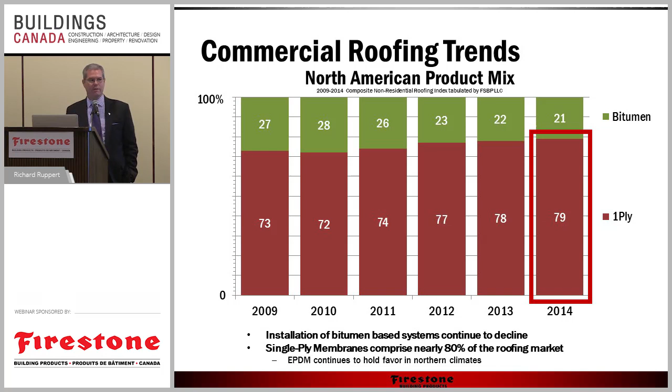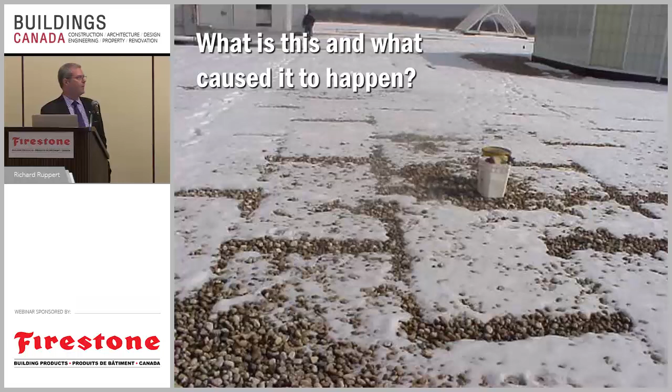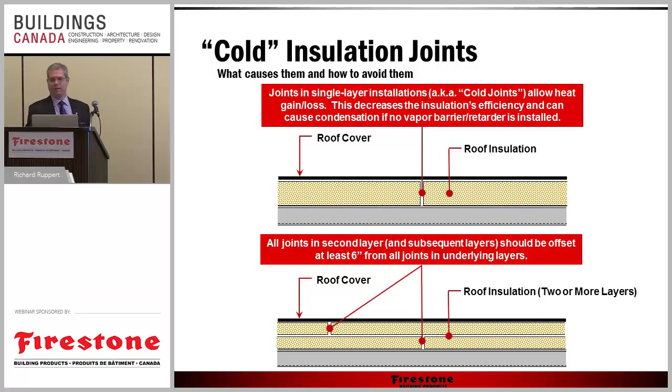I'm going to talk a little bit about insulation. What are we looking at here? That's right, frosted Pop-Tarts, lovely breakfast treat. No, what we're looking at is the inappropriate way to approach insulation. For a long time, this is the way insulation was performed - a layer, enough to maybe keep some heat in during the winter, keep it sort of cool in the summer. The single most important thing you can do with any insulation installation project: offset and stagger, 2 layers in place of 1. That's what it looks like.

Now the infiltration that allows that hot or cold to transfer back and forth is limited to essentially a pinpoint where there might be a coincidental point where the seam is at. But otherwise, you've effectively magnified the ability for your air and vapor barrier to do its work. As a matter of fact, in some municipalities, certainly in the lower 48, this can qualify in a fully adhered system as your air and vapor retardation without a supplemental membrane. That's changing too - you guys are already aware of it, you've been putting that membrane on for a long time. We're just now getting around to it down south.

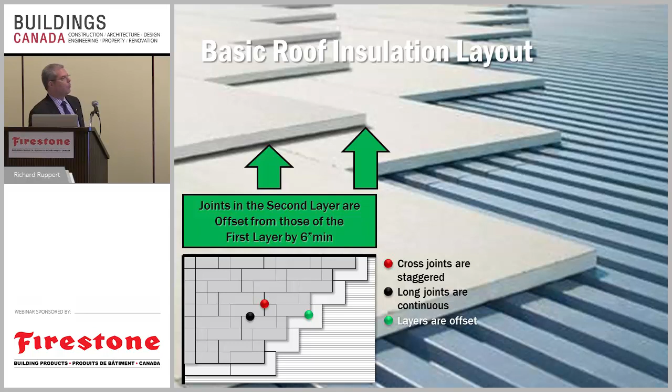When we choose the insulation, there's really 4 types out there that make up all the roofing insulation. Polyiso dominates that market. Why? Well, high threshold of operational temperature, compatibility with a high degree of solvents and adhesives, certainly a much more favorable pass rate when it comes to the FM 4450 - there's also the UL fire tests, in simple terms. Highest R per inch, that alone makes it the most popular. Because polyiso basically acts or behaves like aged wood - it doesn't really burn, it chars.

Polystyrenes, XPS, EPS. EPS is the stuff that you support boat docks with. XPS sometimes has a very low threshold for melting, so you have to always put some sort of thermal barrier, a thermal break, a non-combustible sheet underneath the insulation before you can put it on the building and then put the roofing membrane on top. Polyiso does not have that same level of requirement.

Very popular these days, mineral wool fiber. Roxul is the big company right out of Canada. But the downside is very, very low R value in relative terms. It's very porous, somewhat soft, so it doesn't give you that solid substrate. So if you can be sure you only have lightweight mechanical contractors on your roof, maybe that helps. But there's a tremendous amount of embodied energy to make that. It's superheated to 2000 degrees, spun like cotton candy. That's a tremendous amount of energy that goes into making it. It's considered environmentally responsible once it's in place, but what it takes to get there is another story.

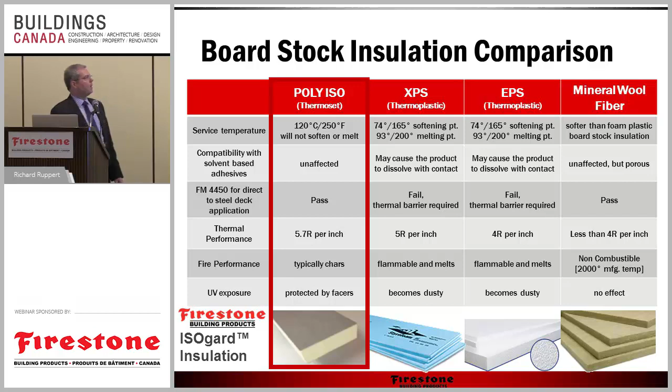You have another option also when it comes to cover boards. For a long time it was always the wood cover, wood fiber. That was very popular, certainly with the built-ups and modified bitumens, sort of the tradition. Then along came the overnight success, glass fiber reinforced gypsum board, Dens for most of us, or SecurRock is another name out there. Various manufacturers have it, but it's much more highly impact resistant. A quarter inch seems to be the most popular.

But I encourage you to take a look at, particularly in conjunction with single ply membranes, high density polyiso - a derivation of the same theme. Polyiso by itself is either 20 or 25 pounds density. This has a much higher density, but it's still the same material. The value of that is that at a half inch, you can get an additional 2.5 R into that roof system. R value is king these days when we're talking about building up that roof.

20 is the nominal starting point. Probably down here in Toronto it's maybe already 25 R. I know upper parts of the states, Minnesota, Minneapolis, it's 35 R starting. So that equates to depth, that equates to thickness of the roof system, right? So if you can get 2.5 R out of the cover board, which is an incredibly important practice to have, versus the dense stuff which is only giving you a quarter R - and even then most architects I know don't really calculate it into the value, you can't really, it's not really fair to do it, it's pretty nominal - so in any regard, HD polyiso gives you that opportunity.

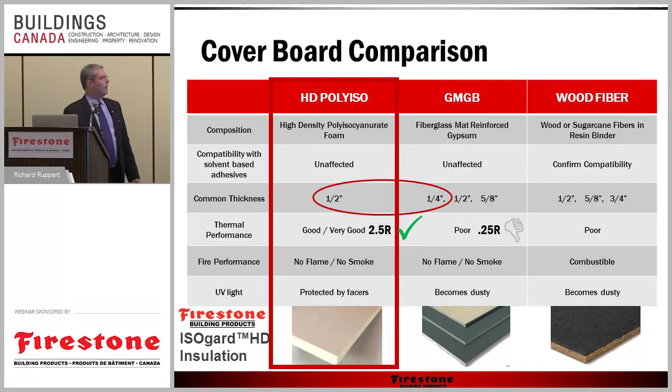In any regard, we're only now beginning to see that in the lower 48. You have always had it required throughout Canada. I don't want to get into building physics today particularly, but I will tell you that Firestone Building Products' commitment is to the building envelope. That's where we are going. Over the course of the last year, I've done significantly more presentations on building envelope than on commercial roofing, and that whole idea of continuity. It's largely being driven in the States by the International Energy Code becoming inherent down there. You've been doing it forever anyway.

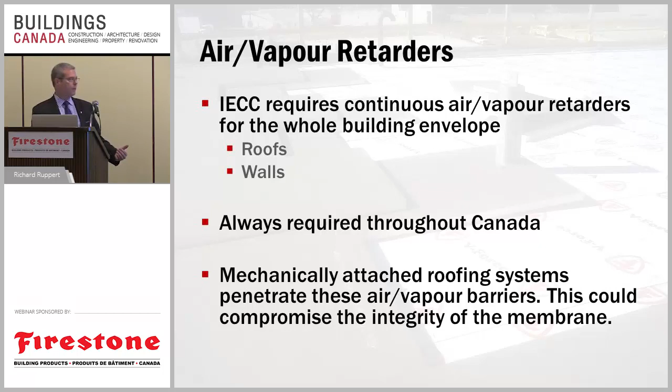But to give you an idea of an opportunity within that roofing system you may or may not be employing, it's something that is self-healing membrane. Because even if you're doing a fully adhered system, you may still have errant fasteners involved, or areas that do have mechanical fastening. One strategy I always used in practice, and still promote heavily, is mechanically attaching the first layer of insulation, then laying the remainder of the system up in adhesive. I think that's a very effective strategy because you're getting the surety of a mechanical fastening to the metal deck in most cases.

You can predict that, and you can get it down very quickly and get yourself a substrate to work off of for the rest of the system. And then laying everything else in adhesive, you've broken any kind of thermal connection from the inside to the outside, et cetera. You can even do that with that polyiso cover board, using it over the top of a mechanically fastened insulation. But the point is, in those cases, you're essentially going to be going through that air and vapor barrier, or that retarder, and most of those do require some sort of a primer, some sort of substrate.

They actually can go directly onto the metal deck itself, and I have no hesitancy whatsoever. I know I've got some consultants out there cringing right now, saying no, you need to always put it on a board.

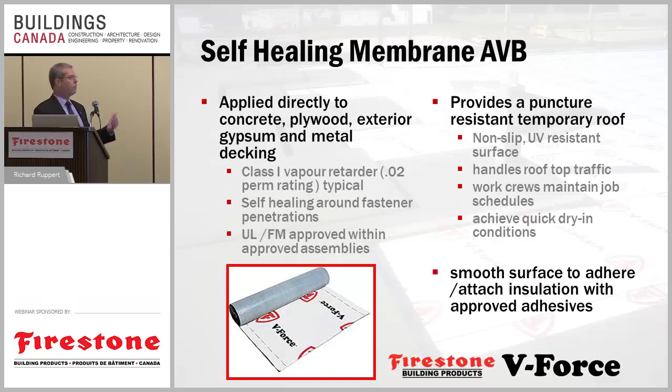So I don't see an inherent risk in not putting down a cover board before you put down that membrane. But the beauty of this is it's self-healing. So when something does penetrate through it, particularly fasteners or something like that, it will self-heal around it as it thermal cycles. So this is just a good strategy.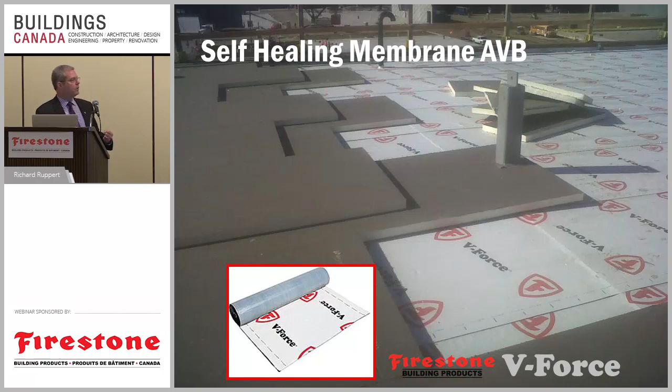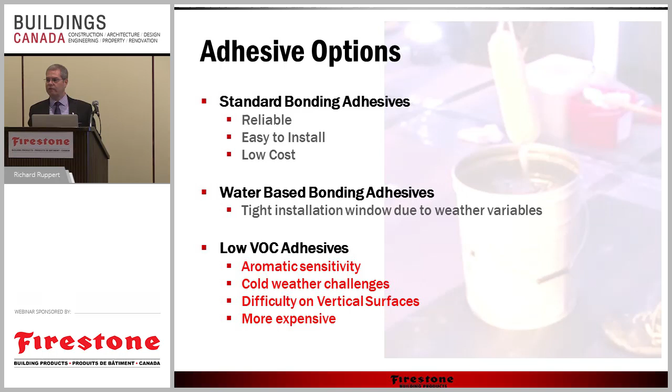You see this thing in practice. I think you're seeing all the best things. These things are overlapped 3 to 4 inches. There's continuity, and you've got boards offset and staggered, high and tight. This is a solid system that's going into place.

Bonding adhesives, another big challenge these days. VOCs, you can't see them, you can't actually smell them. It happens on a molecular level.

Here's the real funny thing, right? Anybody here work with low VOC materials? They're usually the most offensive smelling stuff that's out there. Proof that low VOC does not mean low odor, okay? As a matter of fact, when people smell low VOC adhesive, they become very nervous. Working around hospitals, working around schools, working around public buildings, particularly consulates and government agencies where persons might otherwise want to get the day off or the week off or the month off because it smells bad. Funny thing is, it's more often not proof that they're in a safer environment. It just smells bad at that point.

In any regard, the alternative to standard bonding adhesives have been those low VOCs. How do we achieve that most readily? Water-based adhesives have traditionally been the way to do that, but there's an inherent problem there. Water freezes. Water sometimes doesn't thaw out real well. Water doesn't flash off real well in cold weather, or it flashes off too well in hot weather. So it's got a high degree of sort of reaction. Downside of low VOCs, aromatic, cold weather challenges - they don't flash off real fast.

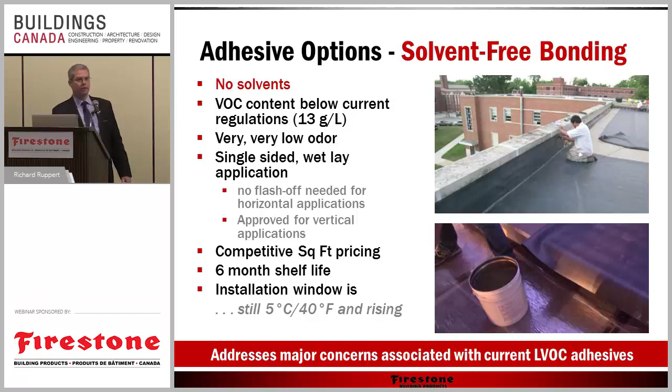Thank you. And this is what it looks like going down. Yes?

The white EPDMs, how does it handle UV exposure? I'll be sincere with you - it does not have as much UV resistance as the black, but it has nearly equal. The way that it's achieved is that what was carbon black in the upper layer of the manufacture is replaced with titanium dioxide, a derivation of the sunscreen that lifeguards use on their nose, sort of a greasy granule kind of thing. The challenge is TiO2 is much more expensive, so that's what lends to the cost. But you can achieve and will achieve the same level of warrantability and longevity as you would with the black EPDM over the lifespan, though ultimately the black has more UV resistance.